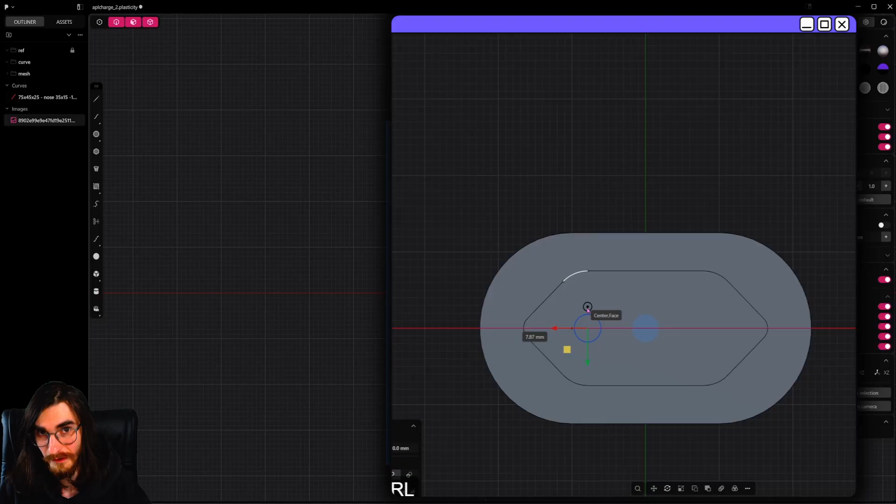Because it's a super easy one, let's make it and drop the material into Blender pretty quickly. This asset is not super big, it's about 75 by 45 millimeters and 25 in thickness. I have all the dimensions here, so let's start from the basics.

First thing, I'll make a little line at approximately 38 millimeters, something like that, as our visual reference. Now I'll create a corner rectangle from the top and make it the size of 45 by 25, basically the size side to side.

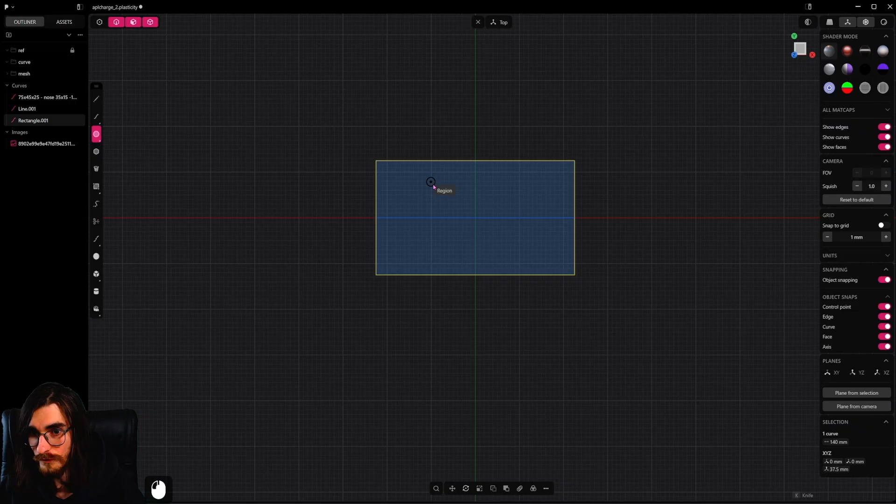25 is okay, but it's better to do a central circle, something like that. Just GY, put it here, GX, put it here. So now we'll have a nice one over here, that's good. We can just Alt-X it to this side.

Perfect, so here is our back side, and I'll take it and just extrude it on 38 millimeters, like that.

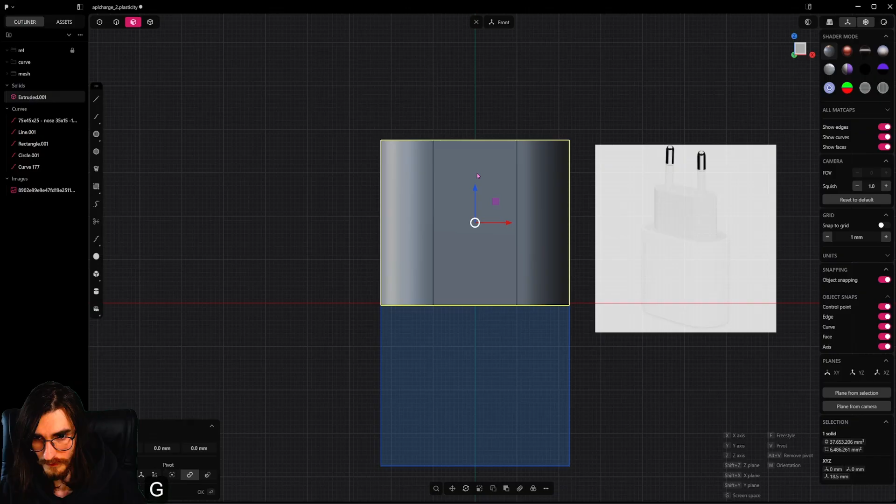Just take this thing, drop it to the ground, GZ, and put it into the deep down. It's just a rectangle and a couple of things: side to side of this thing is 35, and top to down is 15.

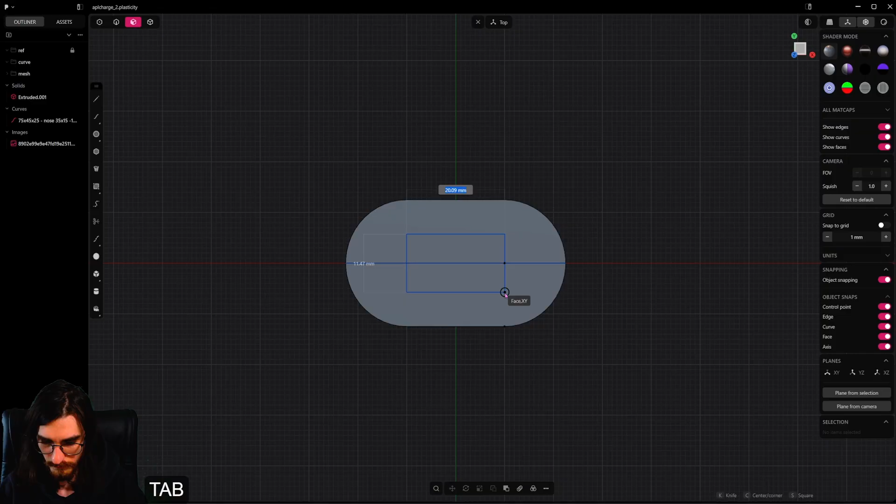Let's do it, drop the same rectangle, make it 35, 15, that's good, they are exact. They're a bit like this, not super straight, but like this, and we can make it the same. Let's do it on 18. Select this, extrude it, right here 18.

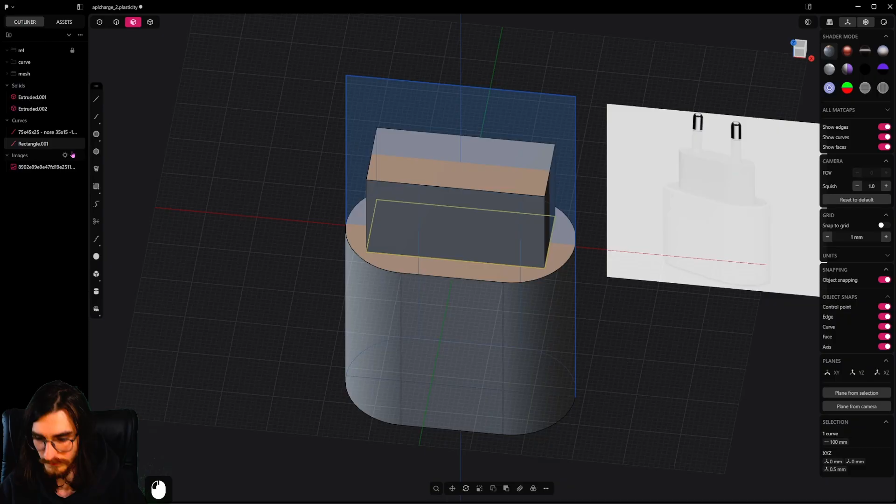That's good. Delete this rectangle and do generous bevels over here, fillets to kind of remind this shape. I think we should make them something like that, just to cover it completely.

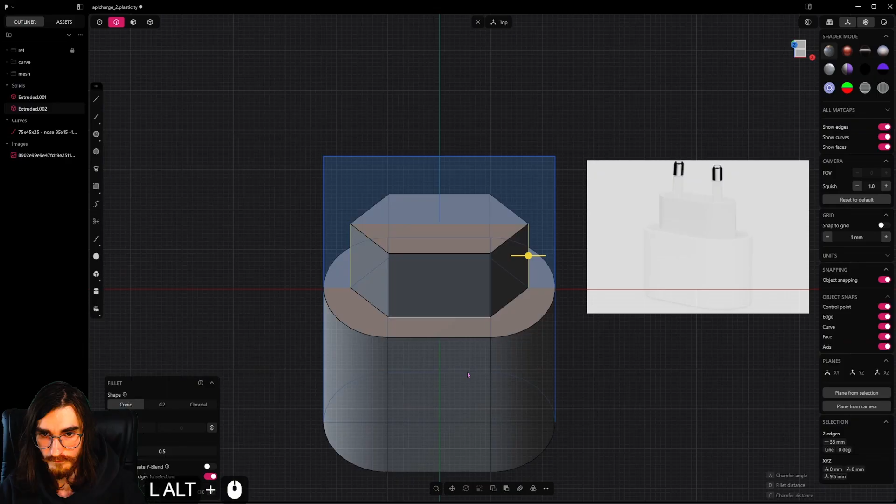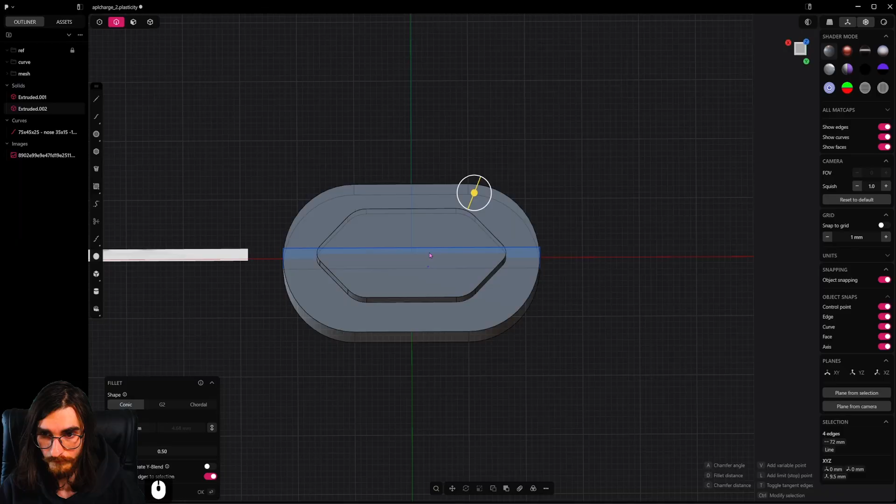Now all we need to do is make the sides of it more generous, like this, and top and bottom will be less generous, like that. Or maybe even more, you know - yeah, they are more generous than these side ones. That's good, this is our beautiful shape.

So what's next? Next we can block out these things and then start merging everything, cutting out, and doing USB ports. For the top part here, it's pretty easy.

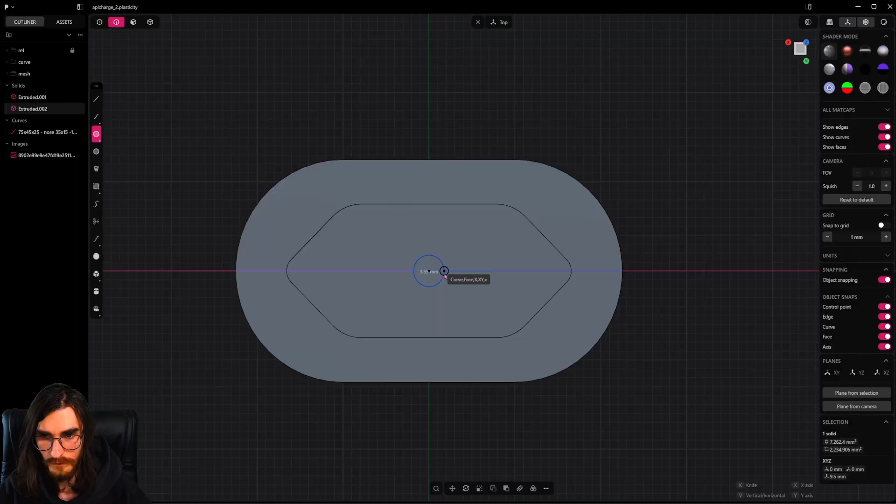We'll just take a central circle. Let's drop it somewhere here, like that, 0.4, something like that. Yeah, it's basically like that. Let's position it over here. I'll just extrude it, so it's about 18, but let's drop this thing at 12.

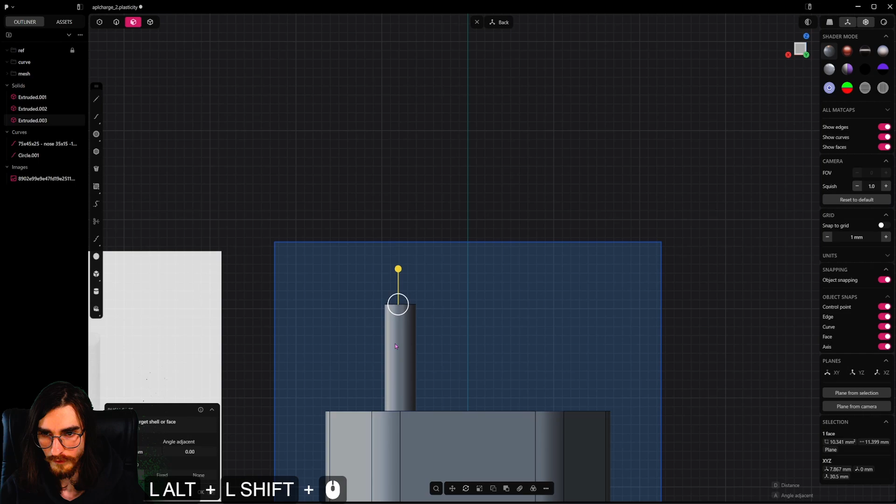Like this, 12 millimeters. And the same one over here, just extrude it on 6 and make it a new body, B. Okay, so here we have it.

I'll also Shift-X this thing and Shift-J it on some sort of a G1. It's like 12 millimeters from here to the center, and I think it's kind of perfectly in the center, so we don't need to bother ourselves about that. It's going to be over here.

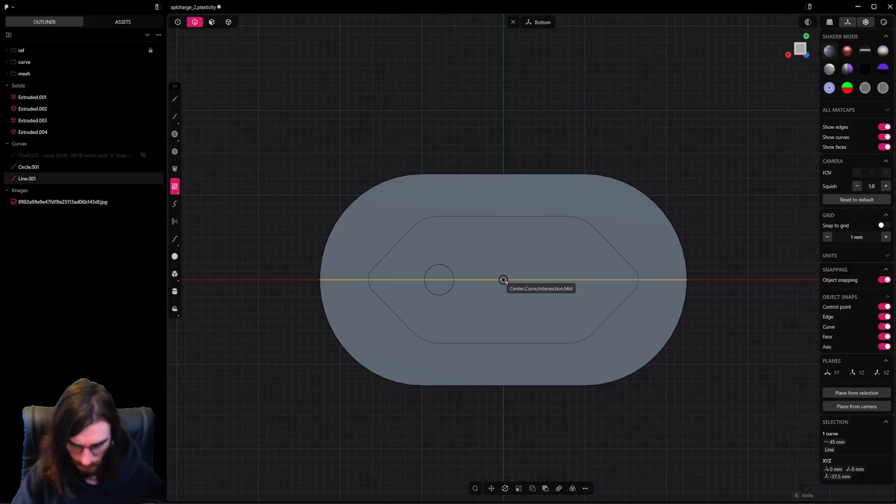So let's just drop a corner box, and I believe it's not super big here, it's like, oh, it's 1 centimeter, kind of like 1 centimeter or something, maybe a little bit less. Let's drop it like that and make it central.

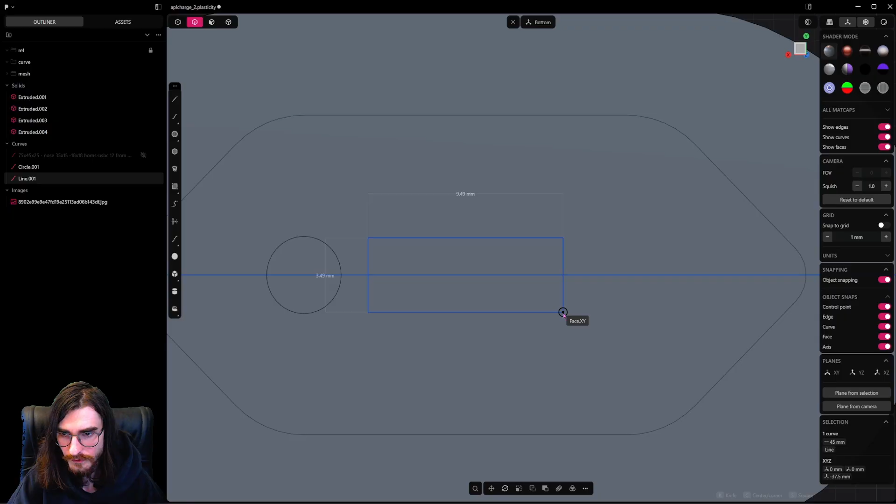Make it a little bit over here, for 4 millimeters - it tells me something like 3-4 millimeters over here. Let's drop it like that. Yeah, I think it's a bit smaller like this, definitely not bigger than the...

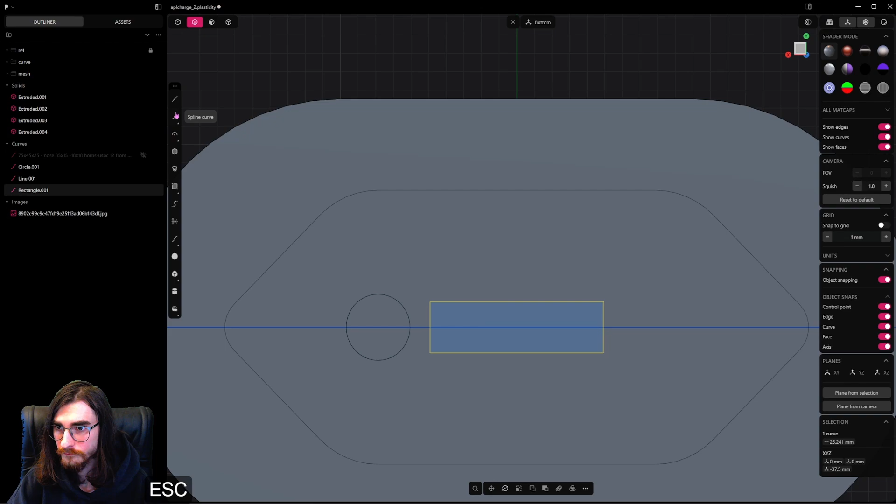Here I'll just drop the same thing, or I can do a central point arc. Something like this. Let's make it like this. Okay, Alt-X, drop it here.

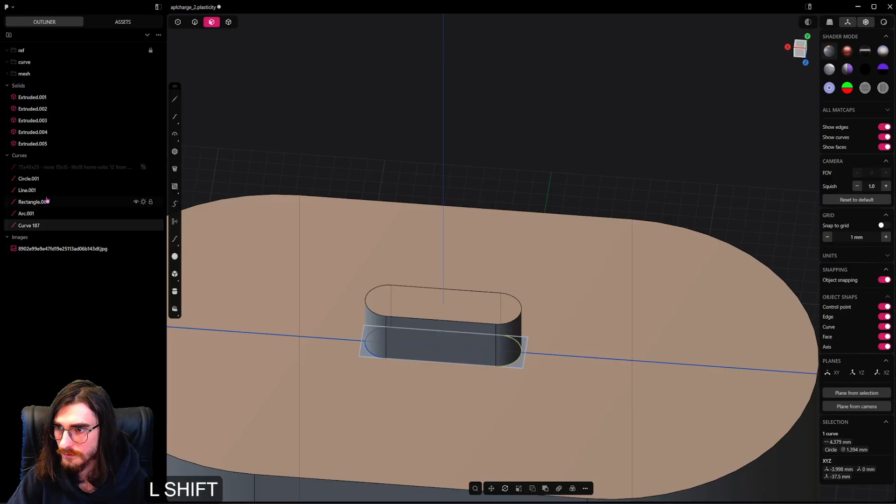That's good, and just create the Boolean object over here. Let's do it like this. Delete all these things, and just put it here, Q.

Here we have it, a nice little hole. Make it much deeper there. Okay, so here we have it, here is our base shape.

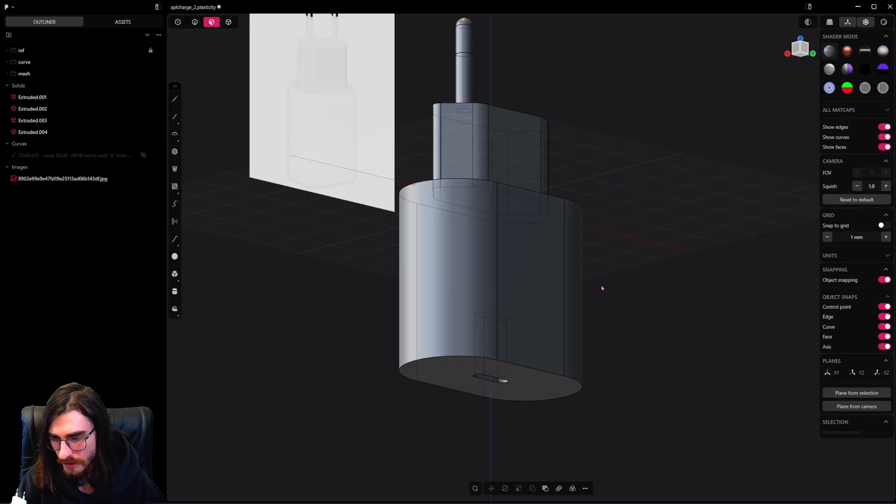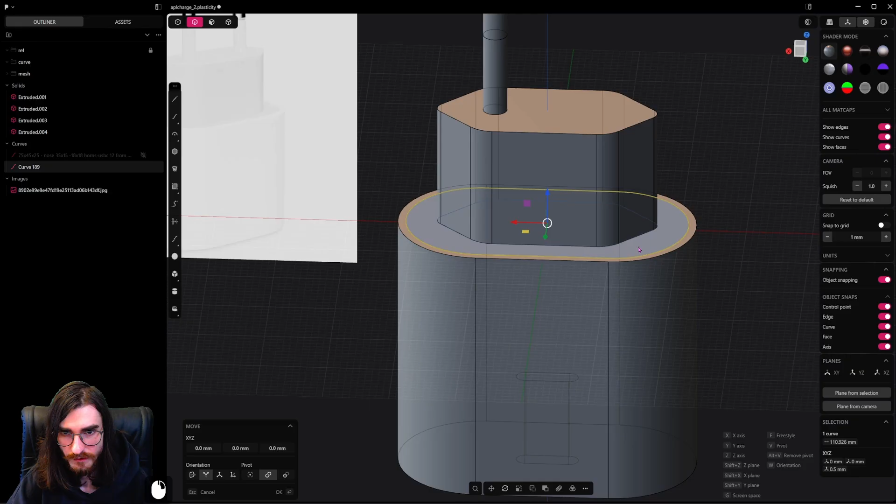What's left here? Some details, of course. Let's do this inner part here with this gap. It's basically, I think, some kind of offset of around 1.2 millimeters, something like that. Yeah, definitely, and it should basically be made like this. So I'll do a Shift-D and I'll drop C, cut, and right-click to apply it. Delete this curve.

Hide this one. Take this thing, Alt H, and make it just a little bit smaller, just to have a small gap there.

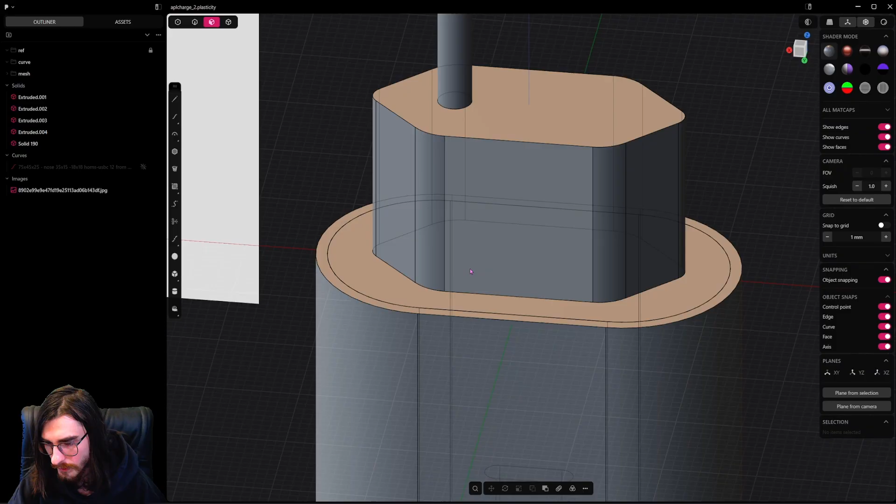Over here, it's just solidly in there, no gaps, just a subtle different color. And the top part of this thing is reminding me about the same shape that we already did.

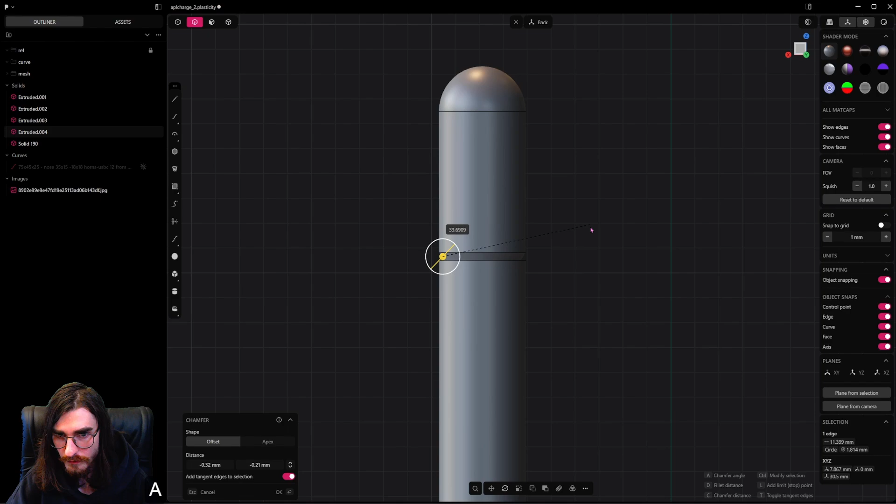So let me hide this one for a second, take this thing, Alt H, and do a chamfer here, like that. Perfect. And you know, I think this chamfer is not that easy. It's like that, but then we can press A and make it kind of like this. Okay, that's good.

Now, basically, that's all of it. So let's just take this thing like that. Let's hide this one for a second. Let's make this a bit like that. Good, is it?

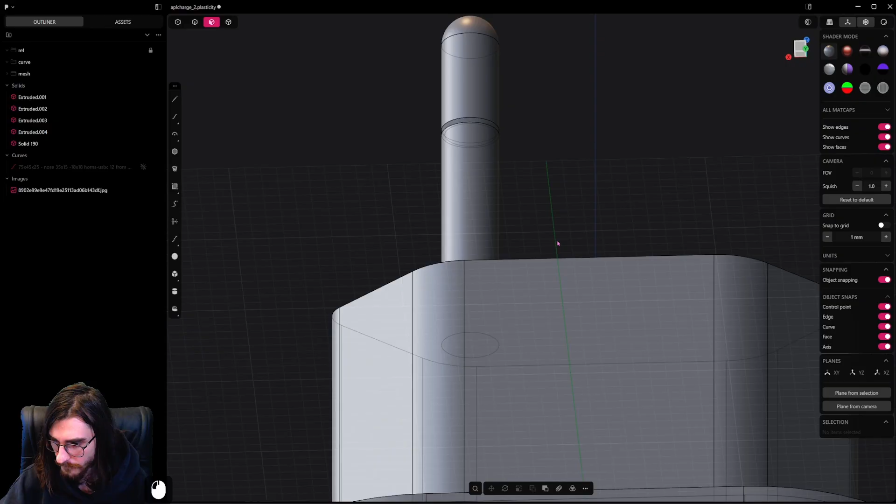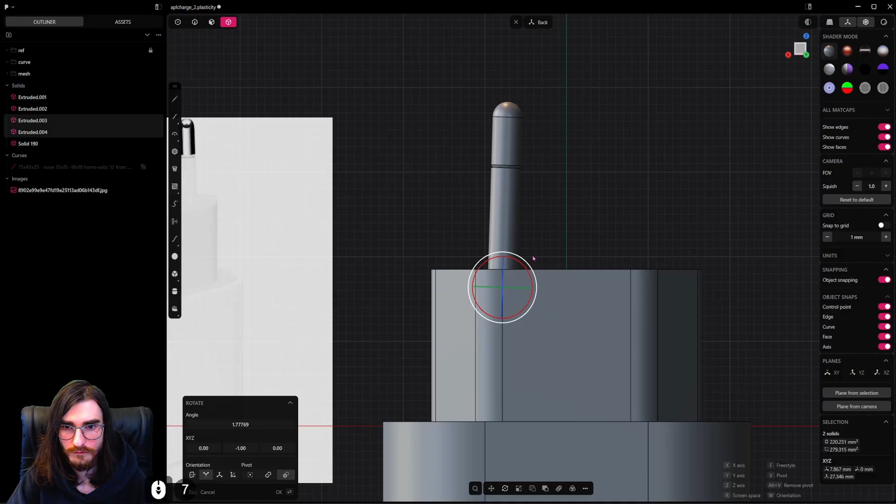We just need to take this, do R, V, put it right in here, and do a little angle. So I believe it's something like that. Maybe just a bit more like this. Yeah, I don't know why it has it. Maybe not so big.

I'm bullshitting here. Let's just R, V and try it not so big. Yeah, like this. And just Alt X it to this side. This is basically what I see here. Like that thing, you can see that. It's kind of not perfect.

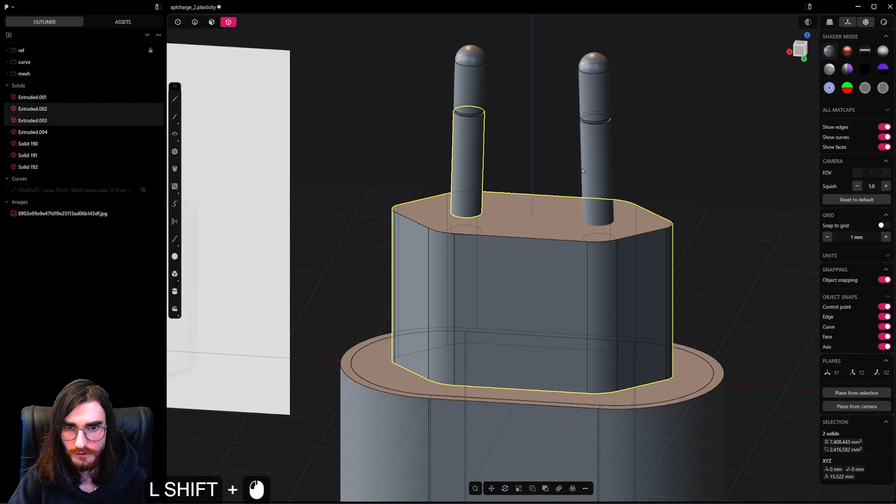Okay, let's just Q, T, right click to apply. Good. And select these here and just make a little bevels there. We also want a little bevel here, why not, like that.

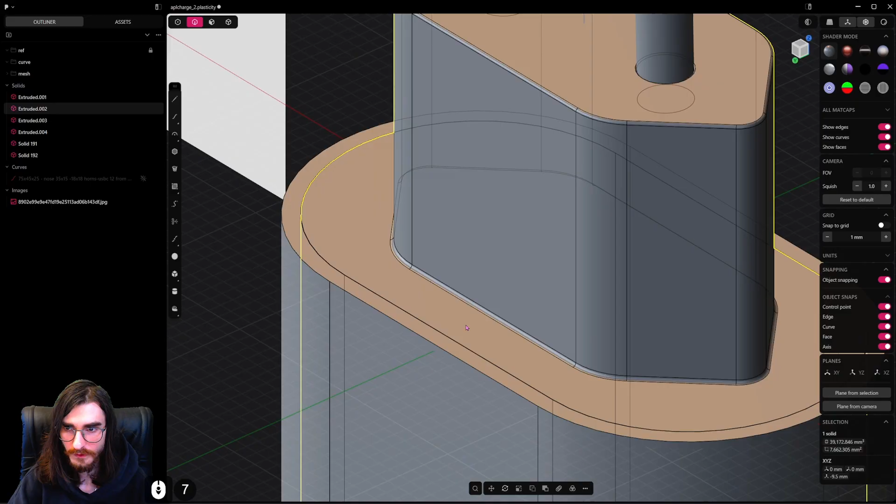And here should be a bit bigger one, but first thing first, we need to merge it with this thing. Now we can drop a nice bevel over here, like this. Also, I want a little bevel here on that part, and on these two parts as well. Let's just drop it like this. That's cool.

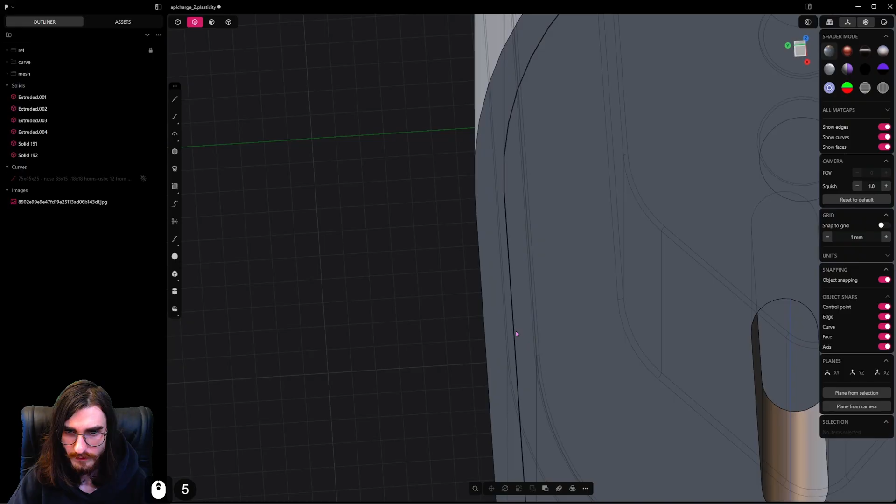It's micro fillets, and you definitely don't need to do them if you're modeling some sort of things.

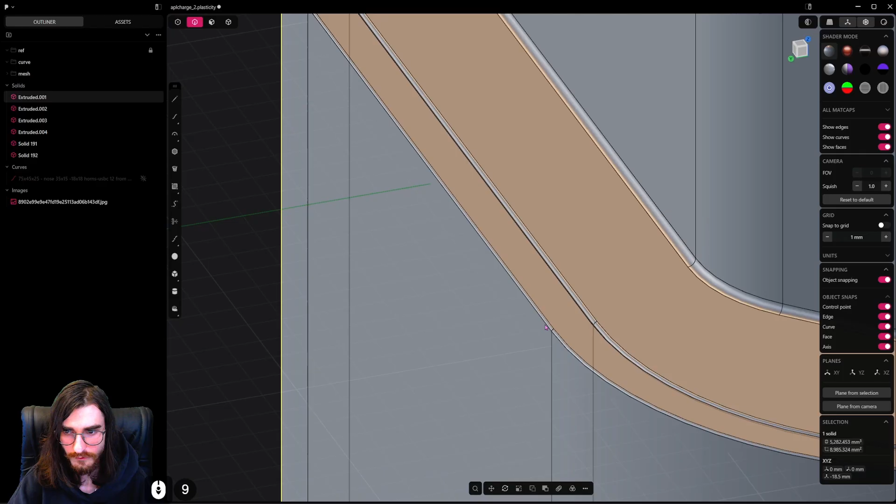Let's just take this and click on this one, so it will replicate the size of it, and do the same over here. So we will just bevel it like that, go to the top here, and select this thing, right click, left click. That's good. And now we have a perfect little asset.

Over here is just an inside part of this thing. Let's just take it, make it O like this, and extrude it over here like that. Perfect.

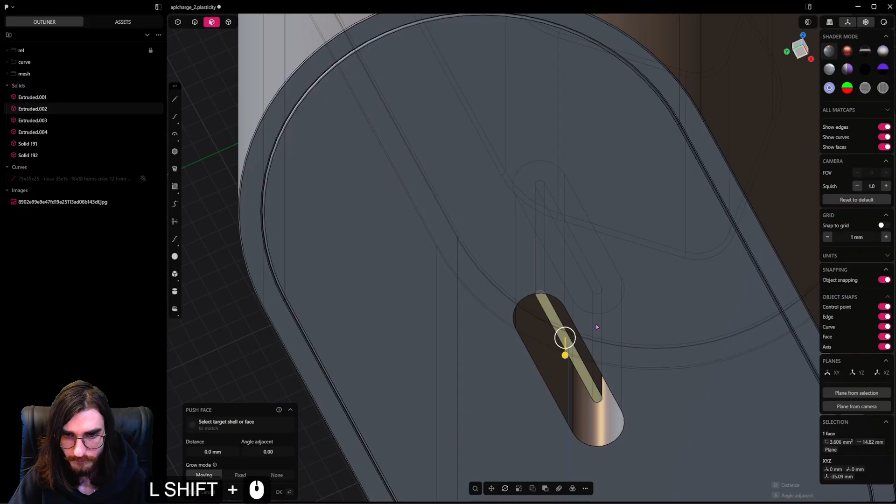And now let's take and make it some sort of this thing, kind of closed, but not for 100%. And here I want to drop a little this thing. I don't know, there's no sign of that thing, but I just want to drop it there because it's cool.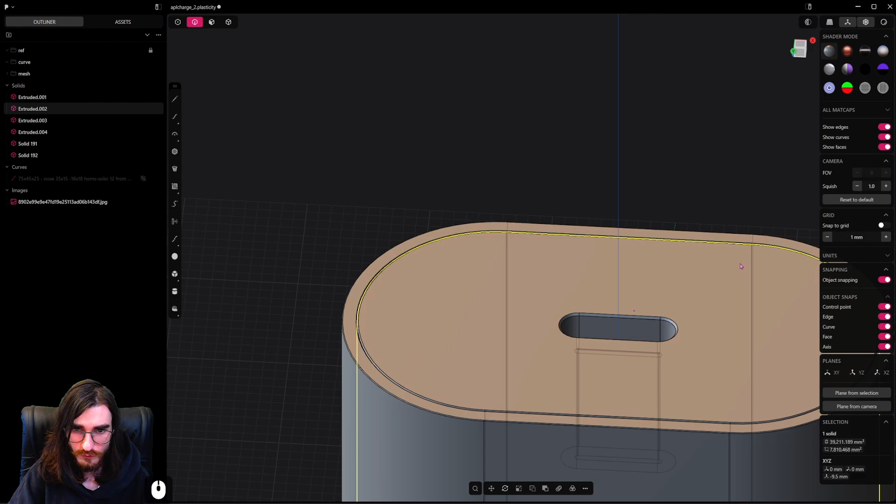Okay, so here it is. Beautiful Apple charger thing. That's pretty cool.

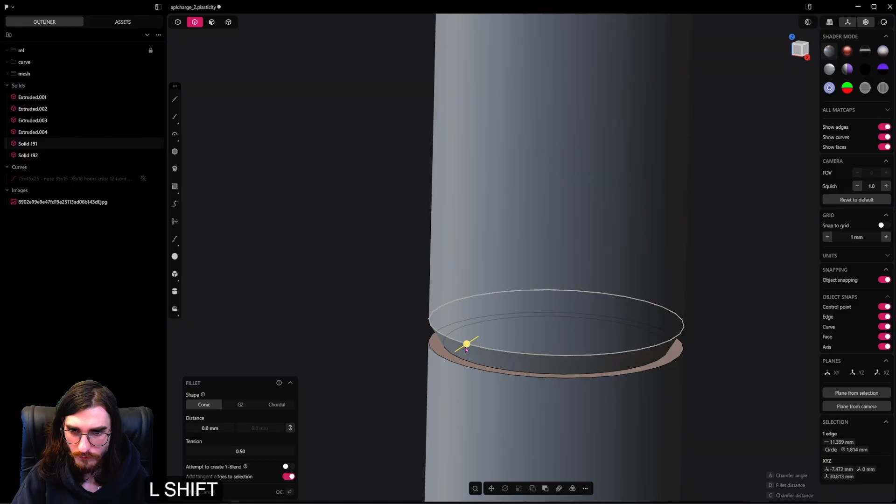And as I told you, let's drop it into Blender and have a quick render of it. We can also have a small bevel over here, just like that, because why the heck not. Let's do it together with this thing, so like this. Perfect. And these two also should have little bevels over here. Cool.

And yeah, that's basically it. That's basically your mesh.

Perfect little Apple charger. And here I have already set up the scene with Apple charger number 1. You can watch this video on my channel.

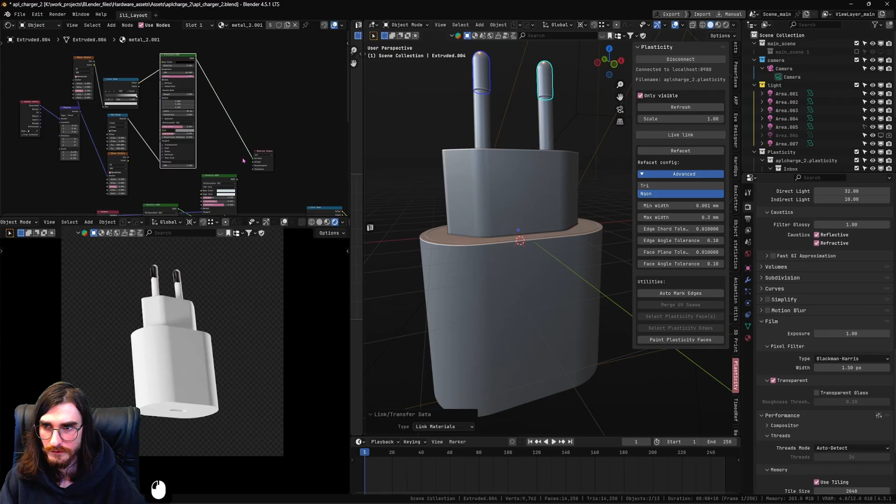Already looks great, but let's take these things and drop the metal on there, and Ctrl L, link materials, like this. This one is our beautiful plastic, and all of this is plastic number 2. And this thing is also the same plastic over here.

Rotate it a little bit. I think I can just rotate the mesh. So I will just take it like that, Ctrl P, object.

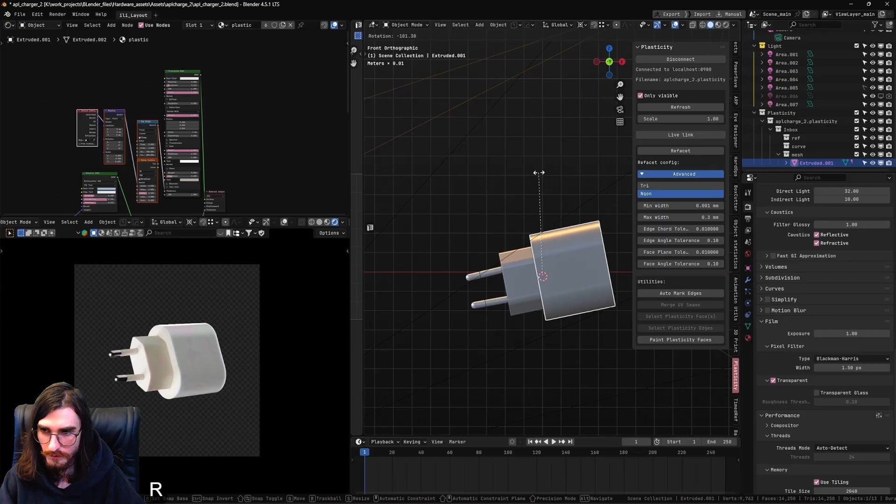Let me just do a little rotation here, rotate the camera a bit, and make it a bit bigger. Yeah, that's good. Look at this thing, pretty cool.

Let's break down the materials a little bit. It's not a super hard thing. You just need to replicate all these numbers and you'll have yourself the same material. The one over here is the same but with a different color.

So basically this setup with map range and thin film, you can learn about it on the channel Christopher 3D. I will tag his video in the description, and you can jump in and see how this material works with thin film. Basically, thin film gives you some nice iridescence on the material and creates this interesting pattern.

So if I just dial the IOR a little bit, you can see what this thing actually is. All you need to understand is some numbers that you put here and use inside your mesh. Just experiment with them and it will be good. So here's this basic setup with a noise texture like that, and with map range.

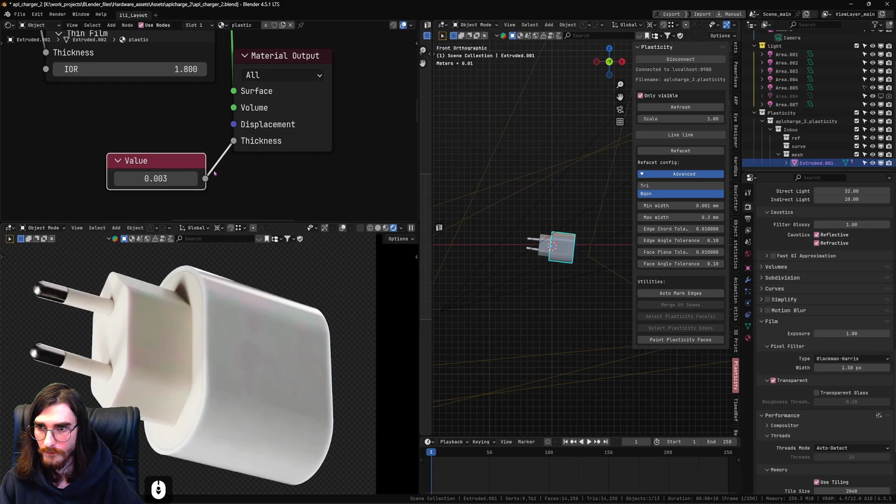And I've added some coat to make it a bit shinier, and a bit of sheen just to get this subtle effect. You just need to spend a little time with these materials to get something interesting. And here in thickness, just put this number, it'll make your life a bit happier.

Metallic, it's also in this guy's video, you can check it out about this metal thing. It also gives you these little effects. You can use metallic BSDF, there's nothing bad in using it. I just think in this asset, this metal looks much more interesting with this setup.

You can see the IOR changes here based on the metal and the pattern that I really like. If I start to move it, you can see how it changes. This one is pretty perfect. So just take the noise texture, take the map range, plug them together with these numbers, and you'll have something interesting.

It's not a rule to use noise texture, you can plug in anything you like, Perlin noise that we already used, and so on, with map range, this classic thing. I also dropped the same noise texture here but changed the numbers a bit, plugged it into the color ramp and dropped it to the roughness, so I can have some nice variation in roughness.

And that makes this material even more interesting. The IOR here is about 60, it's crucial. Just check the video about thin film and you'll understand all these things if you want. But if you don't want to, that's not bad either.

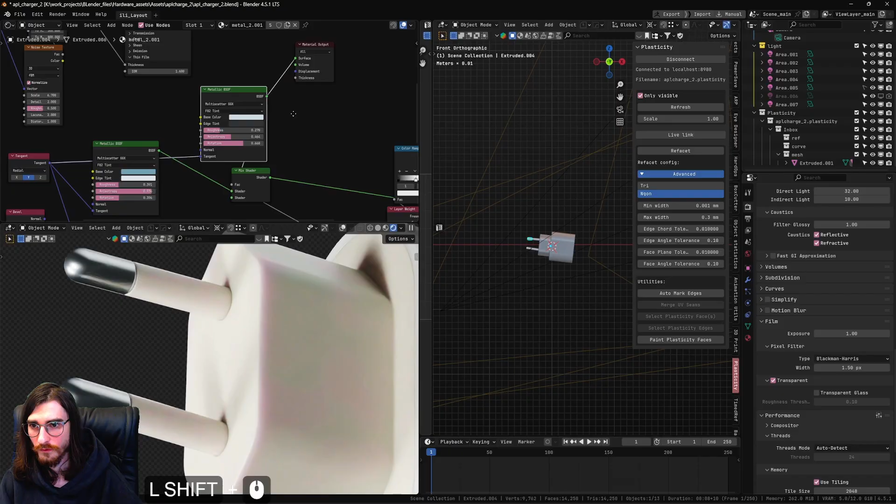Just replicate all of these things, or just drop in metallic BSDF and make it a little darker, I don't know, and you'll have yourself a nice color too, like that. It's pretty much the same, but in my rough opinion, this one is a bit better.

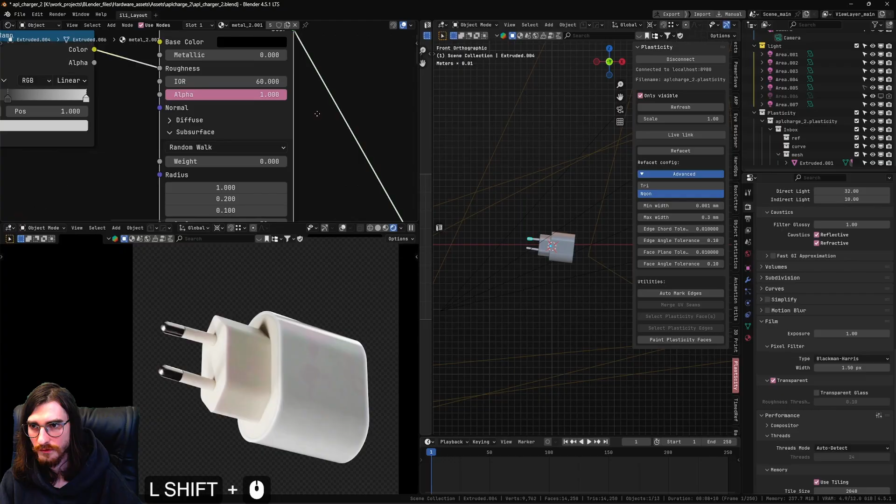Okay, so here's a quick look. If you just want to replicate it, here's the numbers, here's everything. Just copy paste and you're golden.

And this part, the same material, everything the same, but I want to make it a bit grayish, maybe some sort of this. Yeah, this is good, some sort of this. That's pretty much it, here's your beautiful Apple charger.

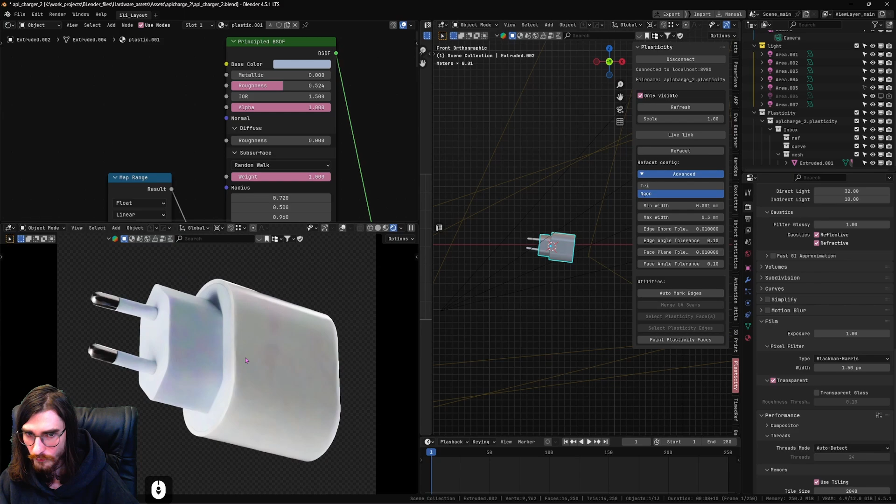You can render it and have fun with it. I will also maybe change some of these things if I wish. You can see how I could add it on top, but I really like how this light is traveling there. Maybe I want this effect, maybe this.